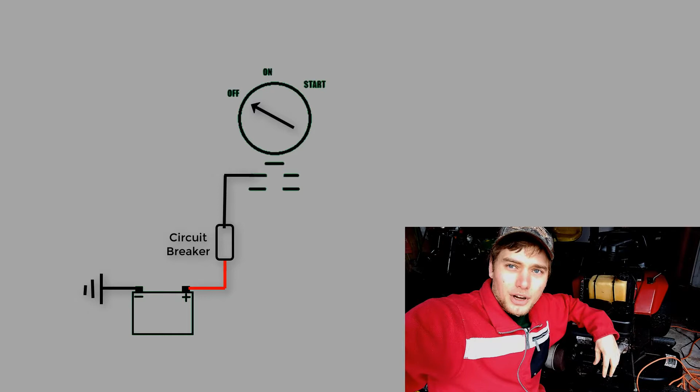Once we have our battery power, that needs to go to some kind of control mechanism. The control mechanism is something like your key switch, or in the case of my John Deere, a button and a switch, which we'll talk about later in the video. But let's focus on the key switch because that's the standard method.

The first position on your key switch is your grounded-out off position. What that does is it connects your coil up here in the motor, which provides power to your spark plug, and it grounds it out. So that's your first two terminals normally on your switch.

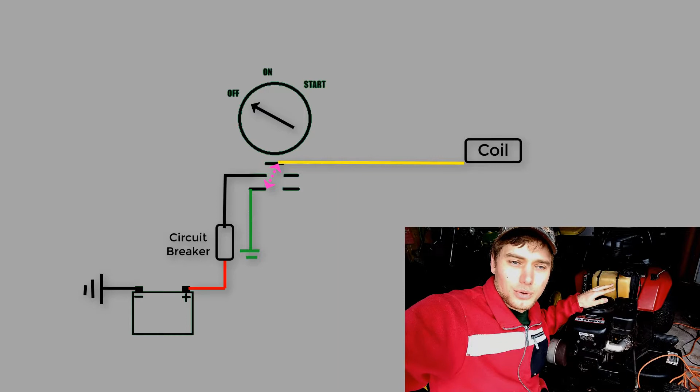The second position, when you turn it to the on position, gets rid of that grounded setting and enables power to flow to your starter coil. However, it doesn't turn over the motor, so it doesn't actually start yet.

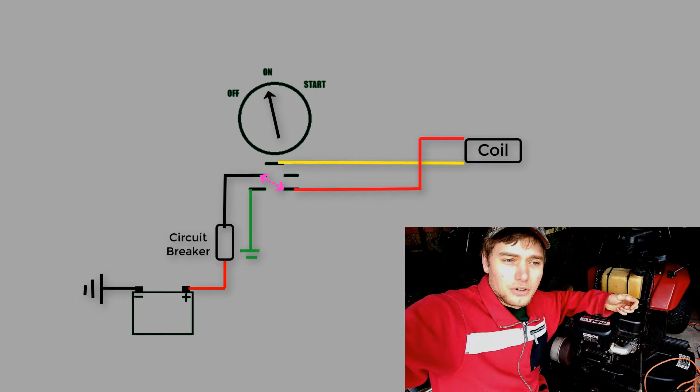There's one other position on the switch, your start position, the final third position, which is a momentary contact position. What that does is it attempts to provide power to your starter solenoid. In order to get to that, it has to flow through your safety switches, which normally include a clutch safety, a neutral safety, and possibly a mower deck off safety. All of these switches are in series, and they need to be in the on position in order for that power to flow to that starter solenoid.

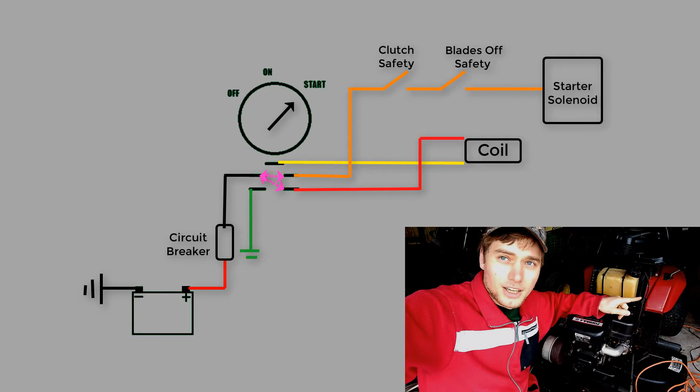When they're in the on position, that starter solenoid kicks in and allows the high amperage battery juice to flow directly to the motor and kick over its starter motor. The starter motor then turns over the motor and fires it up.

Now, if you're having issues with the tractor firing up, that could mean you have an issue with one of your grounding safety circuits. Remember we talked about that first ground-out position? Well, the grounding circuits on tractors like this are also used as their safety circuits in many places.

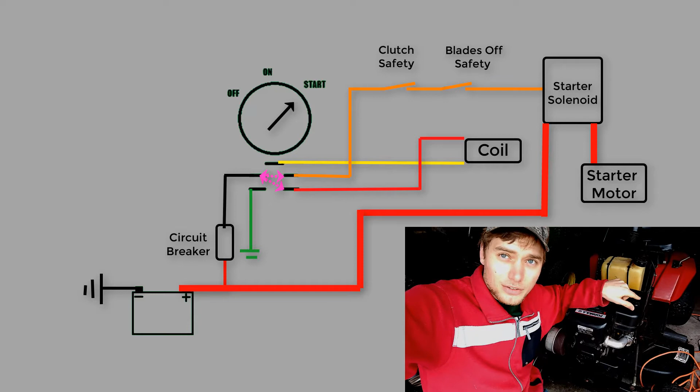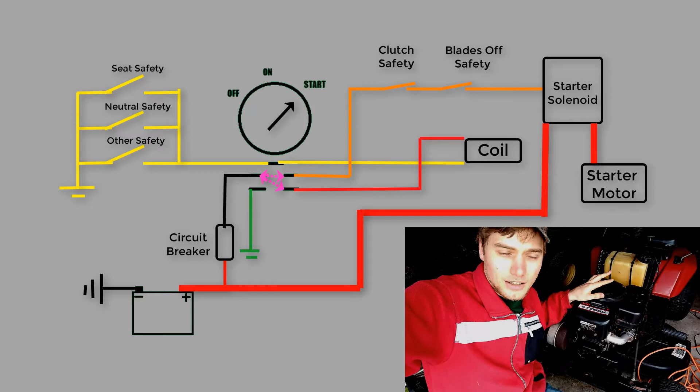You'll notice on some of those switches that when you push them in, there are two wires going to them. That other wire, in my case a yellow wire, is the grounding wire. On the seat switches especially, that's a grounding circuit because it's not involved in starting, but it will ground out the machine if you're not sitting on it - it'll ground out that coil. So these switches you want kept in the open or off position so that current cannot flow through them to ground.

So that's how your motor start circuit works on the tractors. And real quick, I'm going to walk over to the John Deere and show you what it has instead, because it's got a little different setup here.

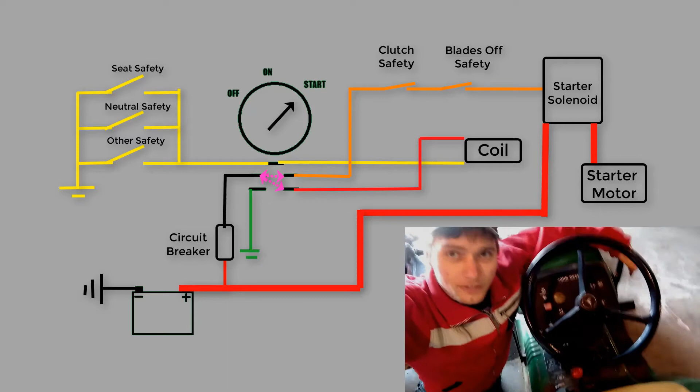So if we come over here, we can see that instead of having a regular key switch, I have a button right here and a regular on-off switch. Now what that does is this switch being in the off position means it's the same as the first position on your normal switch - it grounds everything out. When I flip it to the on position, now I've got power going to all my auxiliary units and my starter coil.

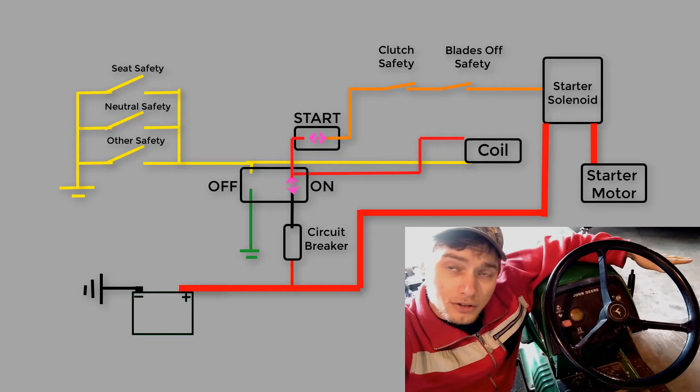Then when I push the button, that's the same thing as having the third position on your regular key switch, where it sends momentary power to my starter solenoid and fires up the tractor.

Anyway, that's enough on starter circuits for today. Hopefully this video helps explain how a lawnmower starter circuit works and some of the items involved in it.